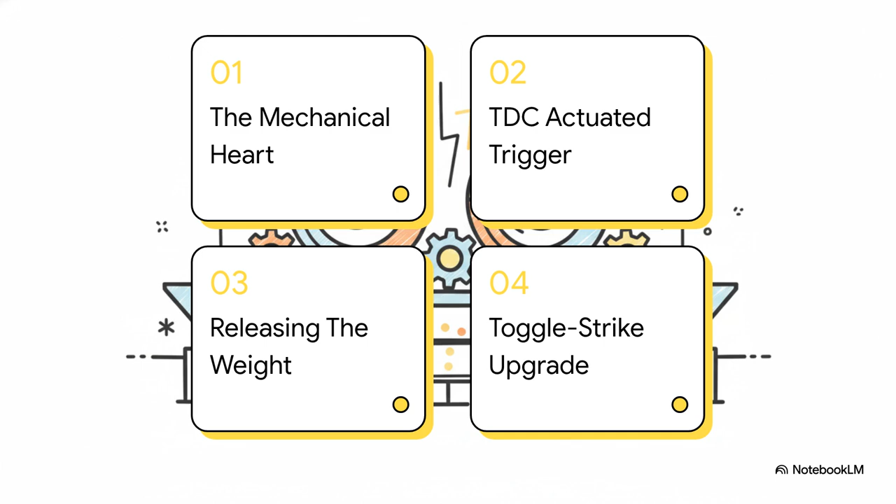Okay, let's quickly look at our roadmap for this. First up, the mechanical heart. Then we'll hit the TDC-actuated trigger, followed by releasing the magnetic weight, and finally, we'll wrap up with the kinetic toggle strike upgrade. Let's get into it. Section 1, the mechanical heart, setting the rhythm.

Before we look at the hardware itself, we absolutely need to lock down one fundamental concept, top dead center, or TDC. Imagine you're pushing someone on a swing. TDC is that exact weightless fraction of a second where the swing hits its absolute maximum height, momentarily stops, and is just about to fall back down. In our machine, this exact geometric peak is the absolute linchpin for the timing of the entire mechanism. It all revolves around this single point.

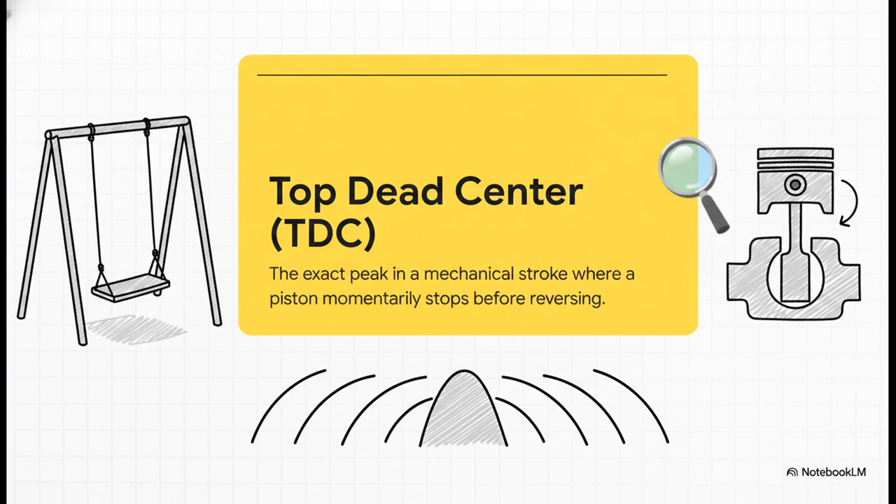What's really fascinating here is the sheer dedication to eliminating friction right at the source. We've got this low-friction crankshaft rotating super smoothly, and it's fully supported by advanced silicon nitride ceramic ball bearings. These ceramic bearings are a huge deal because they ensure that as the offset timing cam starts its rotation, there is virtually zero energy loss to heat or resistance. This right here is where our entire mechanical sequence is born.

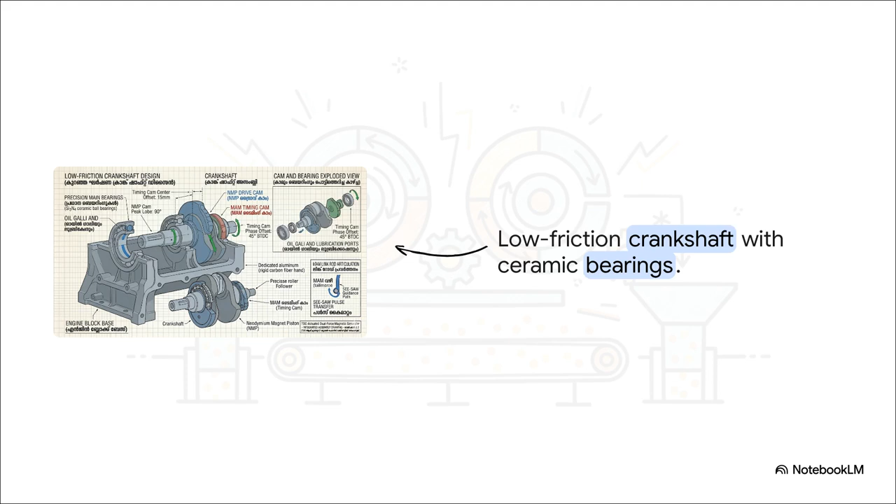Now, as that crankshaft turns, it converts that rotational energy into pure, unadulterated vertical thrust. The Neodymium Magnet Piston, the NMP, is driven upward, but it doesn't just flop around loosely, not at all. It's guided perfectly straight along precision linear rails. So the energy travels upward cleanly and aggressively, thrusting the magnet piston exactly toward its peak.

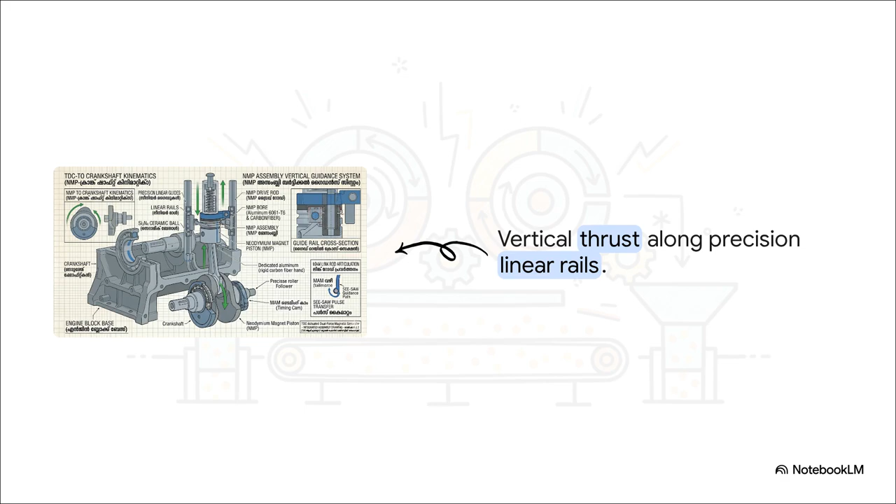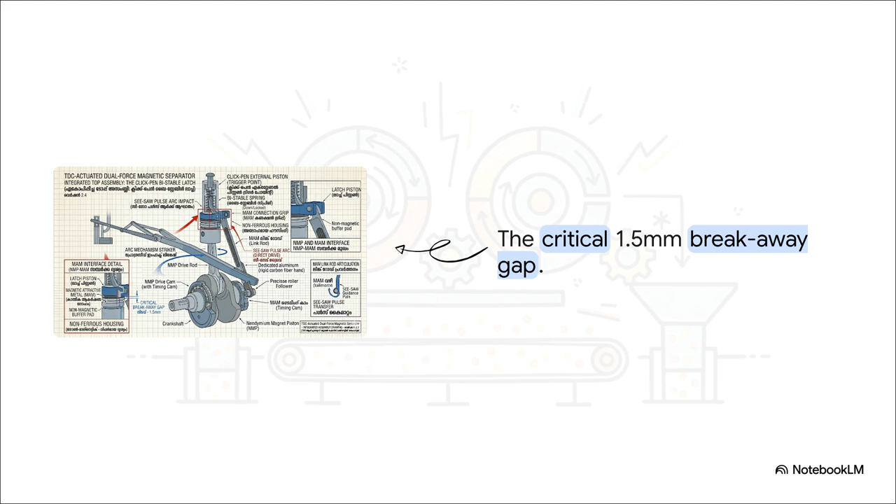Moving right along to Section 2, the TDC-actuated trigger, the critical microsecond. As the NMP travels up to the very top of its stroke, it approaches the MAM, that's the magnetic attractive metal interface, and there's this 1.5 millimeter critical breakaway gap. It's tiny, but as the magnet creeps closer and closer to that metal, the magnetic tension just completely skyrockets. The machine is essentially winding itself up, building into the state of extreme potential energy.

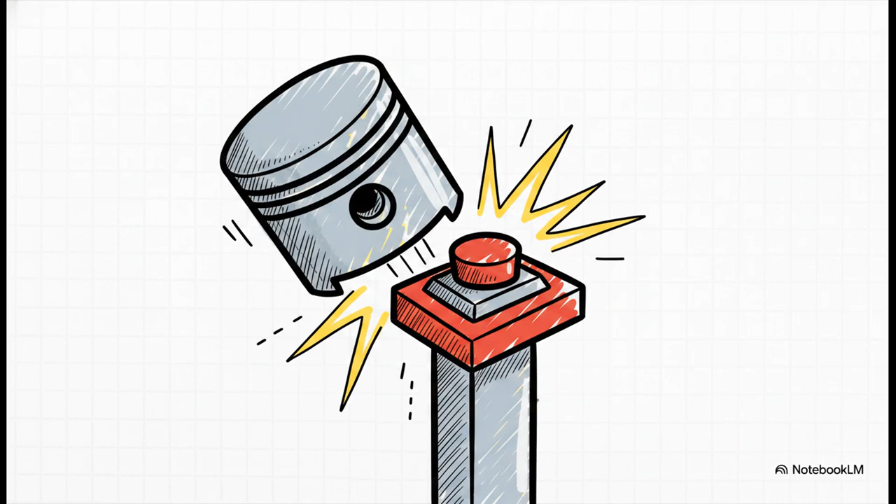So the really crucial takeaway here is that this entire mechanism operates on absolute zero tolerance. It's a perfectly choreographed high-wire act. If the system triggers even a fraction of a millimeter too early or too late, the magnetic separation completely fails. In this setup, timing isn't just important. Timing is absolutely everything. And that brings us to the exact split-second interaction that defines this machine.

At the absolute mathematical peak of its stroke, exactly at top dead center, the rising neodymium magnet piston physically strikes what's called the lock-open switch of the MAM. It's a totally binary moment. The switch gets hit the exact microsecond the piston reaches its apex, and boom, that triggers the next phase of our kinematic chain. Section 3, releasing the magnetic weight, mechanical consequences.

Inside the top assembly, there's this brilliantly simple bistable spring mechanism. Look, if you've ever sat in a meeting and endlessly clicked a retractable ballpoint pen, you already intuitively understand how this works. The moment that lock-open switch is hit, this click pen mechanism instantly changes states. It releases its hold and allows the entire system to physically transition.

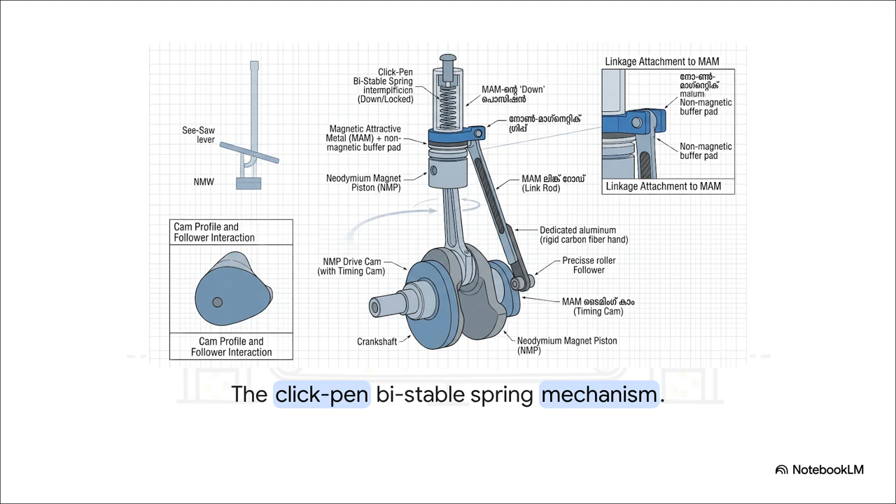As the system unlocks, we can actually trace that mechanical release traveling back downward. We have this dedicated, highly rigid aluminum and carbon fiber link rod. This arm basically acts as the messenger. It takes the kinetic signal from that click pen release up at the top and firmly guides the path of motion downward to dictate exactly what the rest of the machine needs to do next.

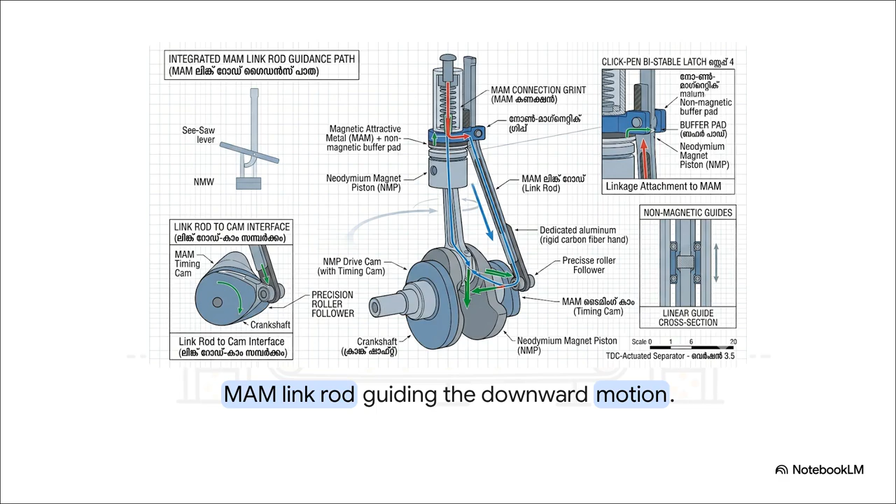Which brings us to Section 4, the kinetic toggle strike upgrade, conceptual evolution. Let's see how all of this builds into an incredibly efficient delivery of power. Picture this invisible kinematic chain reaction based on the latest conceptual upgrades. Step 1. Once triggered, a heavy non-magnetic weight, the NMW, unclasps. Step 2. Instead of just a messy, wobbly freefall, this weight drops flawlessly down its own separate, dedicated ball bearing track.

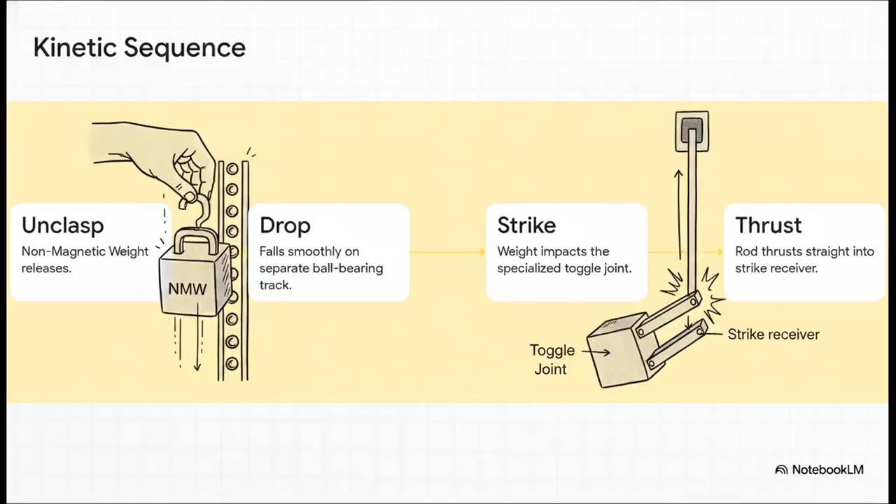Step 3. At the very bottom of its fall, the weight strikes a specialized toggle joint. And finally, Step 4. That joint instantly redirects the downward force, thrusting a vertical rod perfectly straight up into what is known as the seesaw strike receiver. Now, to really appreciate how revolutionary that straight vertical thrust is, we kind of have to look back at the legacy system. The older setup was an arcuate strike force system.

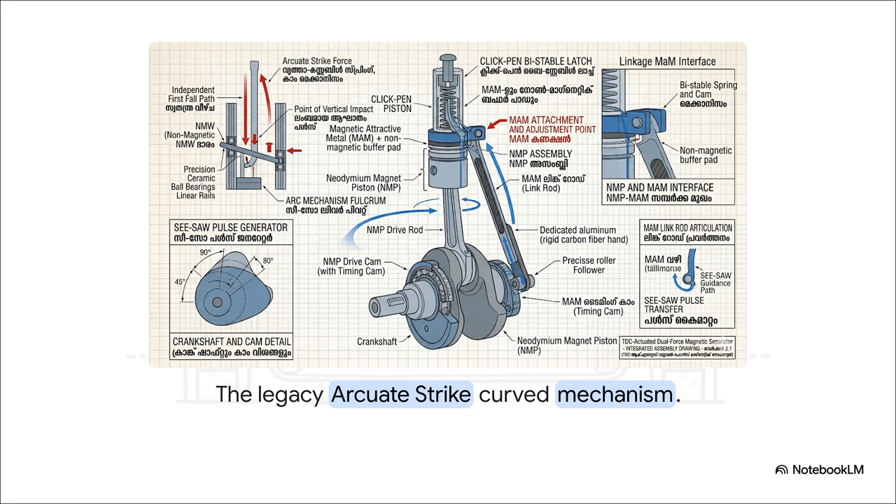Basically, it used an arc mechanism, fulcrum, think of a seesaw pivot, to transfer the impact force in a sweeping, curved motion. Let's quickly contrast these two methods because the difference is a massive game changer. The old arcuate strike force relied on a curved, almost glancing energy transfer. And as you probably know, when things move in an arc, you inevitably bleed off kinetic energy into lateral forces.

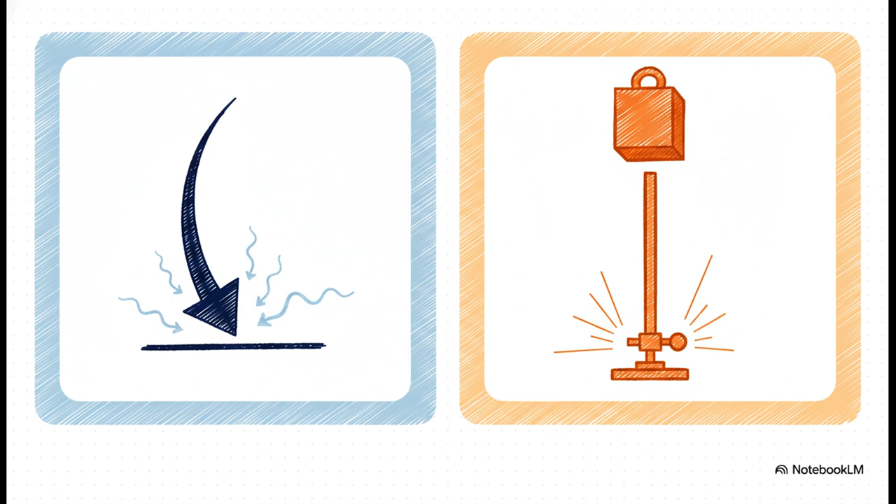You lose power. But the new kinetic toggle strike system, it's pure, unadulterated vertical precision. By dropping that weight straight down on bearings and using a toggle to thrust perfectly straight up, virtually zero energy is lost. It is honestly a masterpiece of kinematic efficiency.

When we step back and look at the entire SSMS, we're seeing a system where ceramic bearings, top-dead center actuation, and toggle strike kinematics all align just flawlessly. It really makes you wonder, if a single microsecond of synchronization can completely redefine the efficiency of this one machine, what other mechanical limits out there are just waiting to be broken by perfect timing?